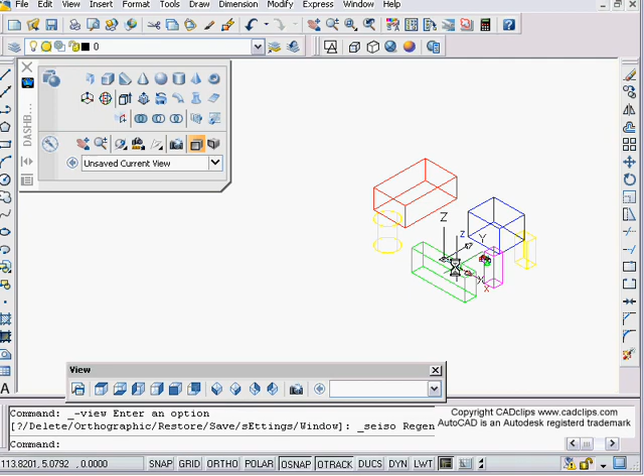Hello and welcome to another AutoCAD 2007 3D CAD clip, and we're going to talk about the camera tool here on our 3D Navigate control panel on our dashboard. And I've just got some prop objects in here as I usually do. I'm going to switch over to the conceptual view, for instance, and cameras are pretty easy. You just drop them in and look.

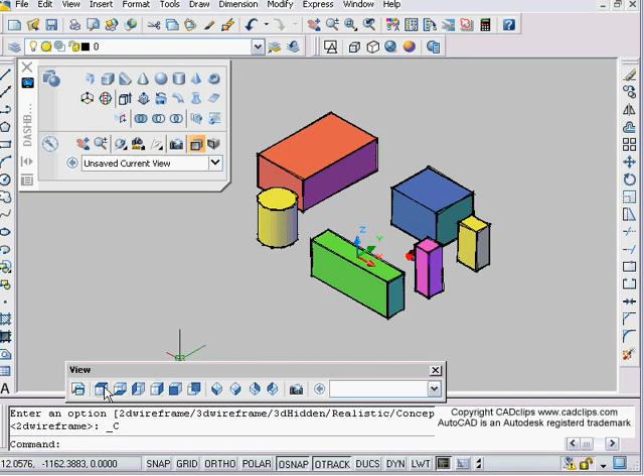The thing about a camera is it has a camera height and a target height, and then basically it looks in that direction, and we have clipping planes which we can turn on and off with our cameras. And I usually find setting myself to a plan view... Oh, I've got a camera in there. I'm going to delete that. And I find, place them in a plan view to start with.

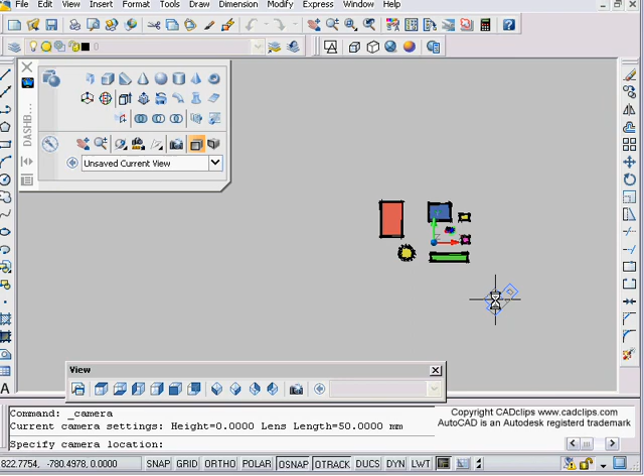So I'm going to go in here and simply say camera. You'll notice that some of these have flyouts too here on the way. Camera. And then it says, okay, specify camera location. And notice that when you place the camera, it always looks back towards 0, 0. You'll notice as I move this around, I'm going to move everything over to there. Okay, now my 0, 0 is here.

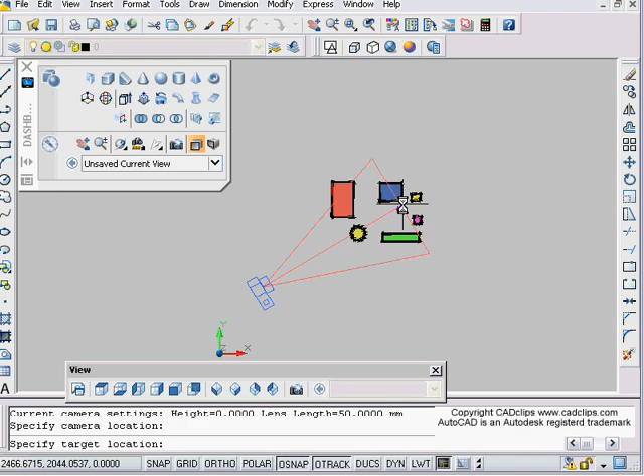Watch, when I place my camera, even though I'm going around these objects, it's always trying to look back at 0, 0, which isn't a big problem, because we can still go over here and place our camera or place it here, and then we place the target. Now you have to be careful because when you use your object snaps, it'll pick up those endpoints and stuff like that. So be cognizant that it is picking up object snaps.

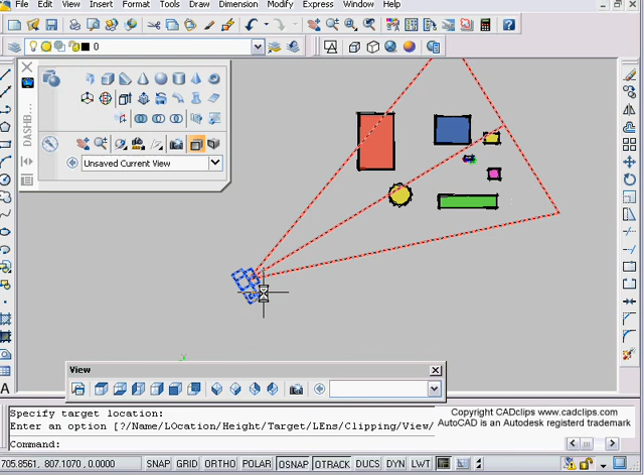So I'm going to just pick a point out here, and then it's going to leave me with some options inside of there, clipping planes, etc. And then I'm just going to hit enter. Now I have that camera on there, and down in here, if I hit this expand button, you see some great stuff for recording animations and stuff. I can turn basically camera display on or off.

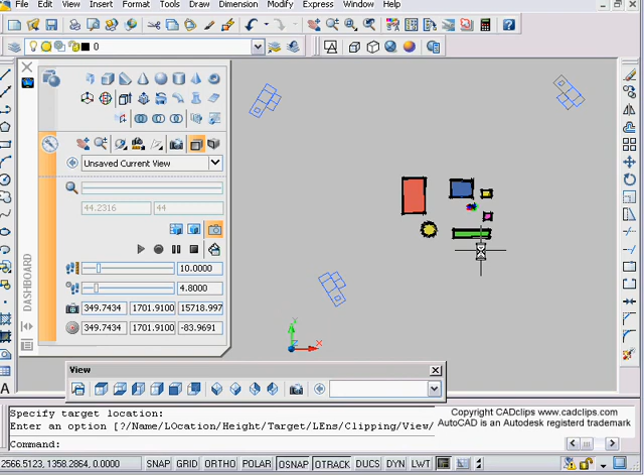So if I create a couple of different cameras around here, I can turn those cameras on and off. Then I can click on the camera and it shows me a preview, and I can have that show or not show in there, and I can also pick my display visual style that I want in there. The other thing is as you place cameras, it's creating views with names.

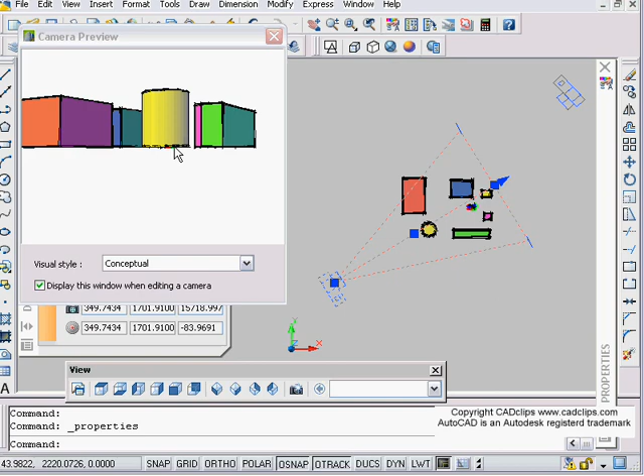You can click on a camera and you can check the properties of it. And it says, okay, this is camera 1. Now notice the camera Z and the target Z. That's why you're always kind of looking down from the ground. So the first thing I usually do with a camera is click on it and check the properties, and I usually bump up, like maybe I'll take the target Z and put it at 10 units high, and you'll have to know what units are relative.

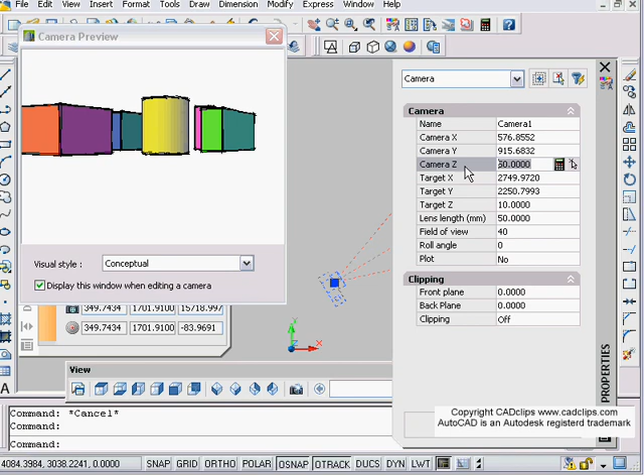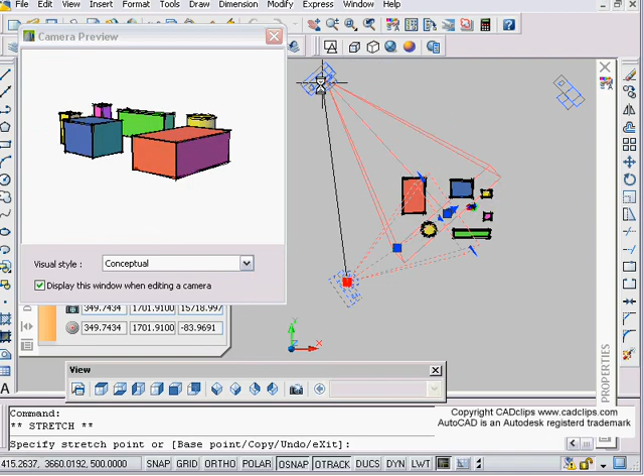And my camera I'm going to put at maybe 50 units high, which kind of raises it up, and you can see the preview. So I'm going to go back and maybe I'll make that 500 units. You'll see that that angle changes. Now as I go in here, I can click on this, and you can see the preview happening in the bird's eye. Well, maybe I want to bring that target there, and then I can work my way around the objects over here, and you can see that quite nicely.

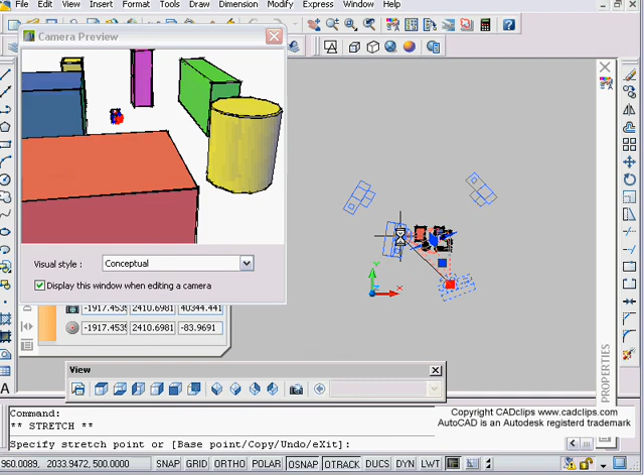You can get right inside, and depending on where your target is, depends on what you'll see when you get inside there. Hit it. And then I can even hit escape, do a regen, and then maybe zoom out and then click on here, and depending on how far you're zoomed out or zoomed in, you can have that picture in picture.

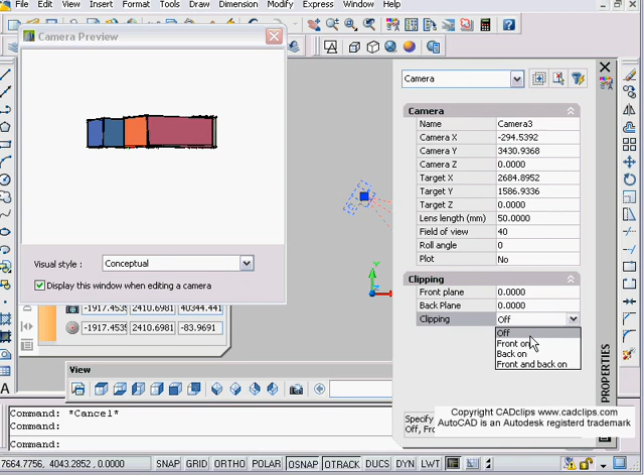You can also click on here again in properties, front clipping plane. You can put clipping on; right now by default it's off. Notice how this one is going to be called camera. Oh, I have more than one selected. Properties, camera name is camera 3. Clipping on, maybe that one has the front and back clipping planes on.

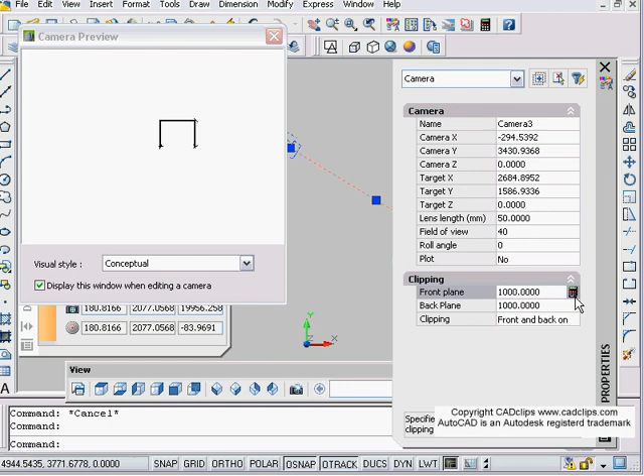So what happens there is we can click on that camera now, and we can set those clipping planes to be a certain distance away, by adding in some numbers, 500 and 1000. Okay, it'll capture part of that. You can go in and use your calculator as well. So you can add those clipping planes, and a front clipping plane is the front one, and then the back clipping plane is the back clipping plane.

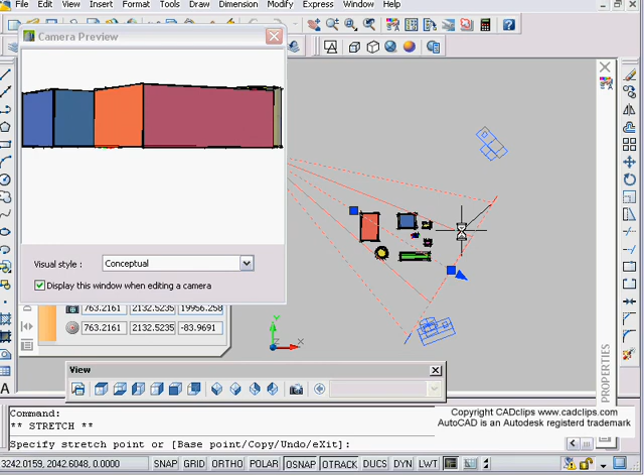You can control those through the properties or with grips if clipping is actually turned on. Most times clipping is turned off, so it's kind of ignored. Okay, we also have some grips over here. Lens length, if you want to narrow the scope of your lens as you're moving that around with your camera. Notice how this one still has a camera height of 0.

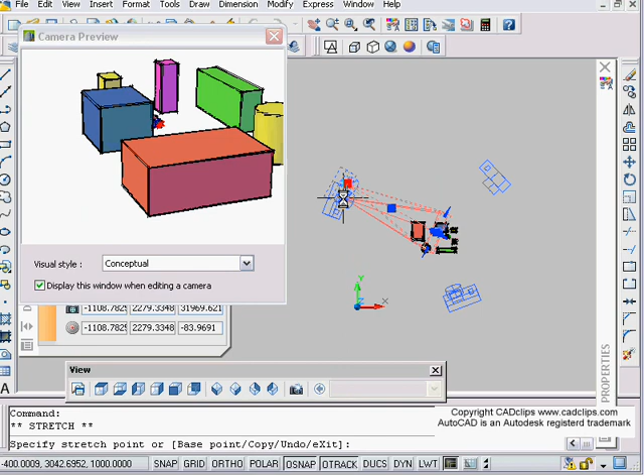Let's change that to be 500 again. Oops. Let's make it 1,000 units high. Okay, now I can move that around, etc. And those cameras also show up if you look in these type of views. You can see that camera again. You can kind of move that around, do stuff with it. The square grip actually moves the camera.

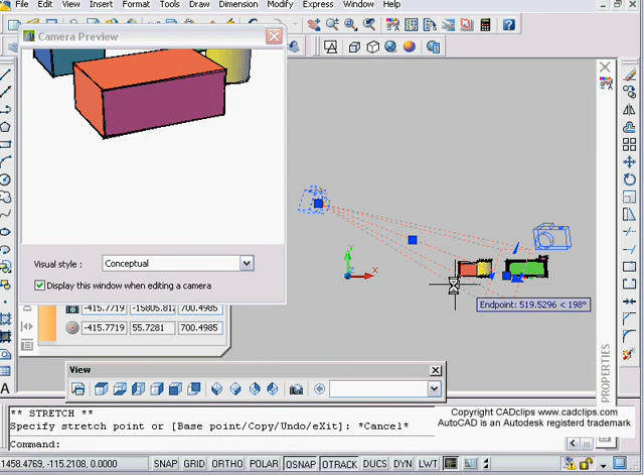These change the lens size by going in and out this way, and then this moves the target, the actual target. So get used to the different grips, and as you change your viewpoints here, you'll be able to see those cameras if they're actually turned on.

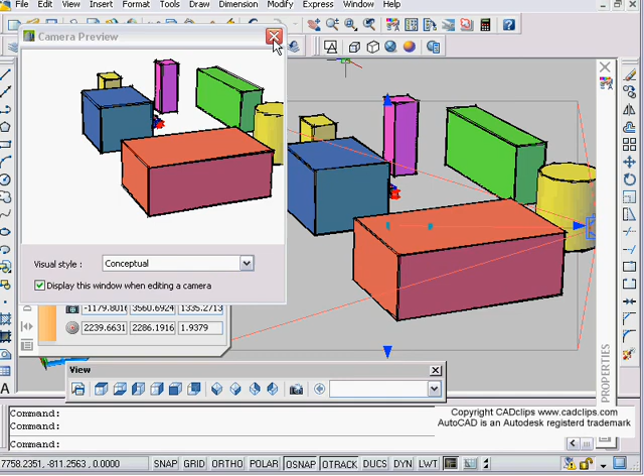So of course the idea is to get one of your cameras, and then if we right click on that, we can say set camera view, and then it'll actually go to that view, and you don't maybe need this guy over here anymore. And when you do that, you can then go in and pick on these points again and change those options for that particular camera.

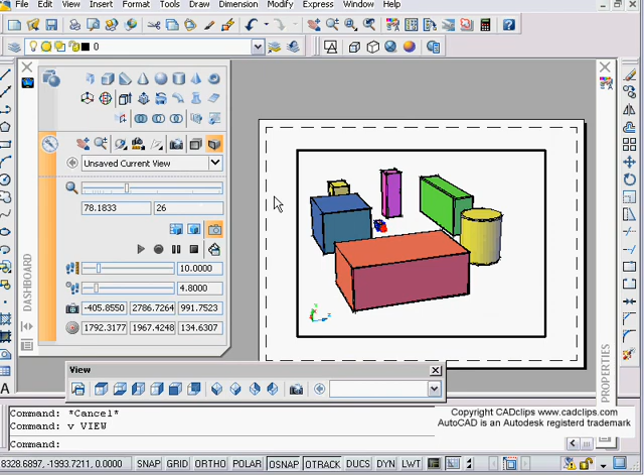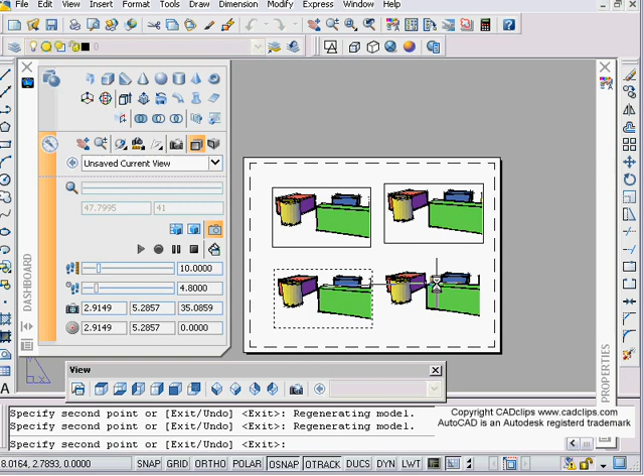As well, if you go into paper space, of course, and we make a viewport inside of here, we can type V for view, and you can say, I want this to be camera 2, or camera 3, or camera 1. So each viewport can have a different camera view. So we can zoom that down and go in there and do what we want with that. And then we can maybe copy that viewport around in our paper space.

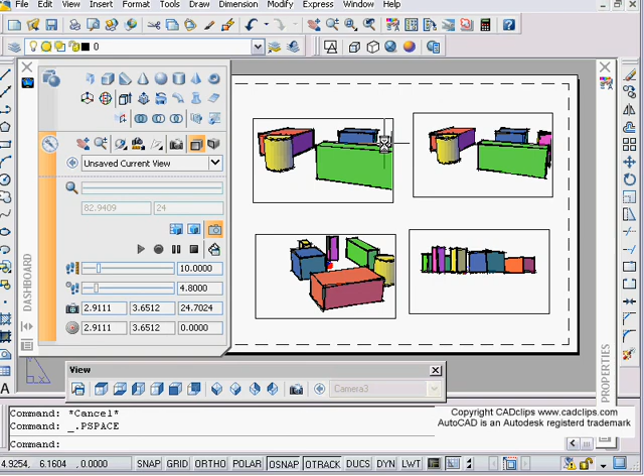And then the idea inside of here is we click in here and set that one to be camera 1, and set this one to be camera 2, this one is camera 3, or whatever view we want. So that's what we can do, and then we can name those cameras accordingly by going back into our model space, as long as our cameras are turned on, and select that camera, and then check the properties, the name, X, Y, and Z. Mainly it's the Z's you want to be able to change inside of here.

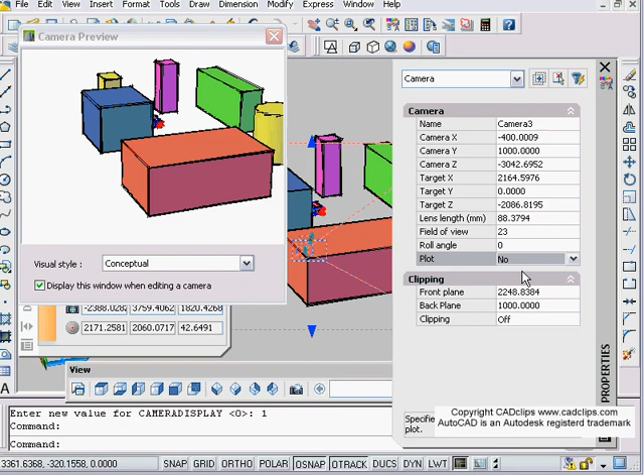And it looks like it's being relative to the UCS or something inside of here. So try playing with these numbers. A lot of this stuff also happens when you change these grips. You'll notice that these numbers in here start to change. It also appears there's a plot option, yes or no, so I would think that it would either be plotting the camera or not plotting the camera, and we'll see some more stuff with animation, etc. in the near future.

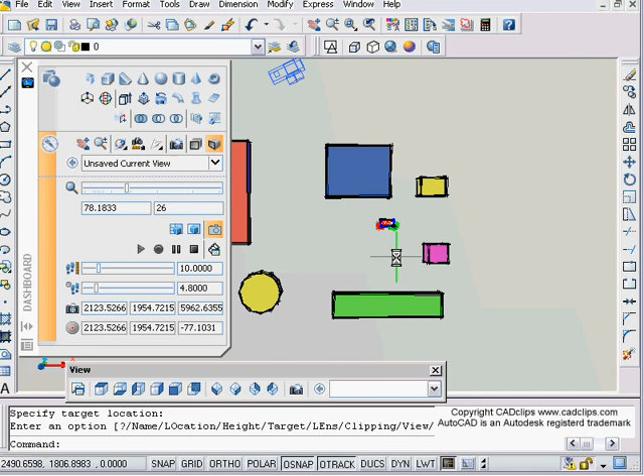So there's just a couple of tips on getting cameras in. Pretty straightforward. Pick the camera tool, pick a point, place it, and then have a look maybe at the help menu and set some more options. Basically, I just place it, and then after you set it, notice your Z, change your Zs, etc.

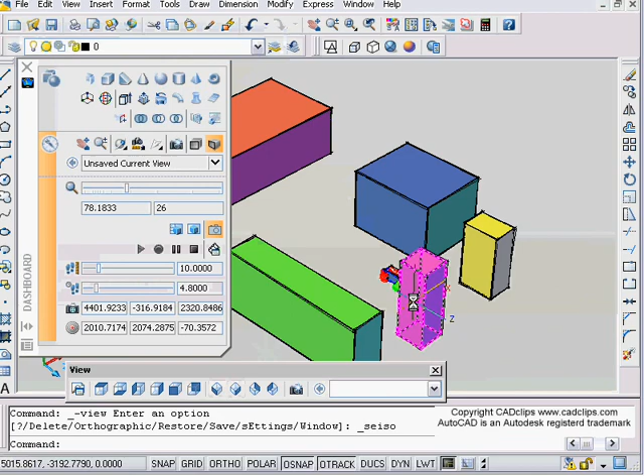You could also move the camera just by going into, for instance, my right hand side view, and I can grab that camera and move it up just by going into that view. Going back to my 3D view, click in here, so off you go. So put your cameras in and then rename the views, and then take those views and put them in paper space and plot them out.